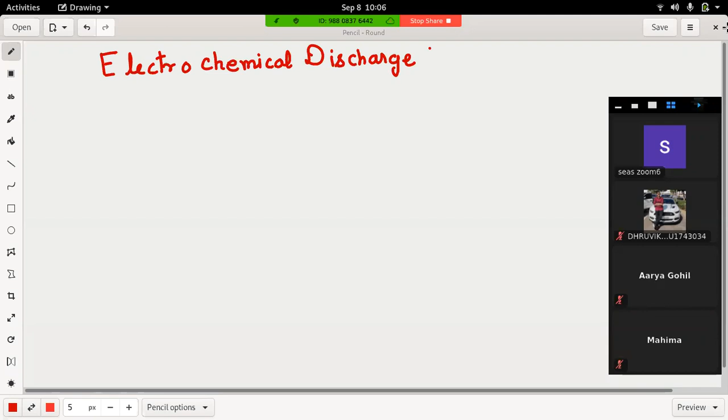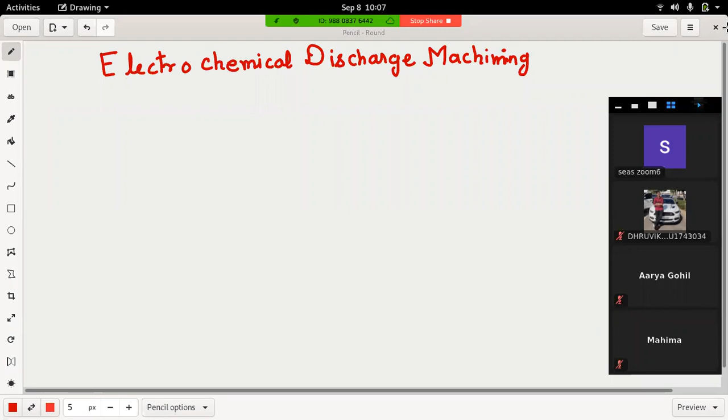Today, we will discuss about another important process, and it's a hybrid process of both the processes, and it is called ECDM, that means electrochemical discharge machining. In short, it is written as ECDM. In fact, the basic purpose of explaining ECM and EDM to you was to introduce this process, that is ECDM.

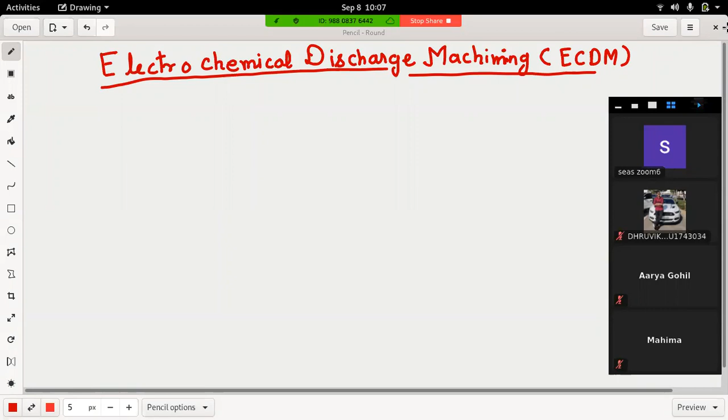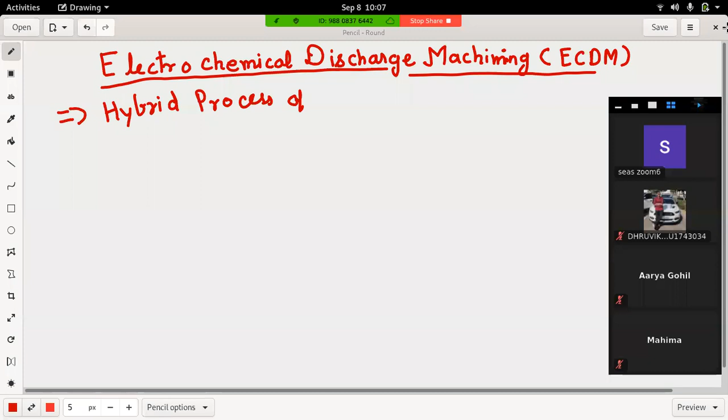ECDM is basically a hybrid process of EDM and ECM, and it combines the principle of both EDM and ECM. Or you can say the material removal takes place by both the processes, EDM and ECM.

Another important thing is that it is mainly used for micro machining, or removing very small amount of material. It is not suitable for removing the bulk material. So mainly used for micro machining, it means removal of the material in very small parts.

And scribing on hard and brittle materials, especially glass. I would just like to share, it is also used for most of the non-conducting materials, like polymers, sometimes stones. This is because the temperature range goes very high, just like in EDM.

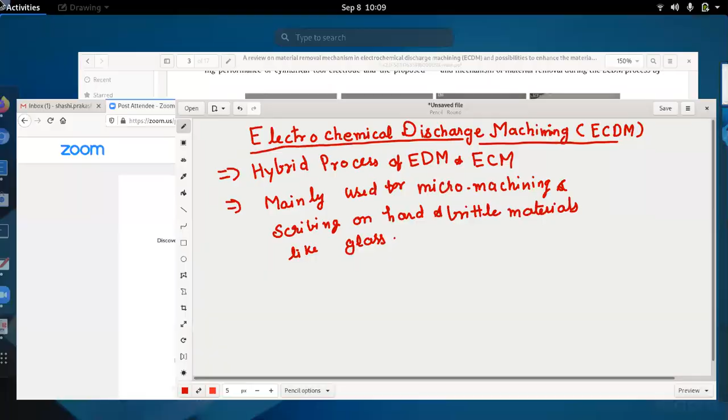And I will share one video before I start, to show how the process goes.

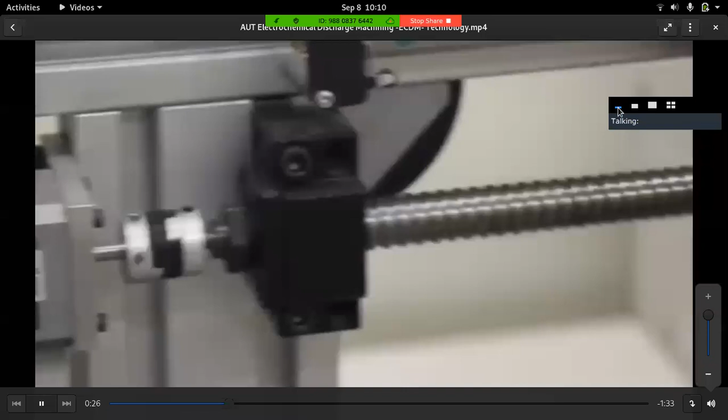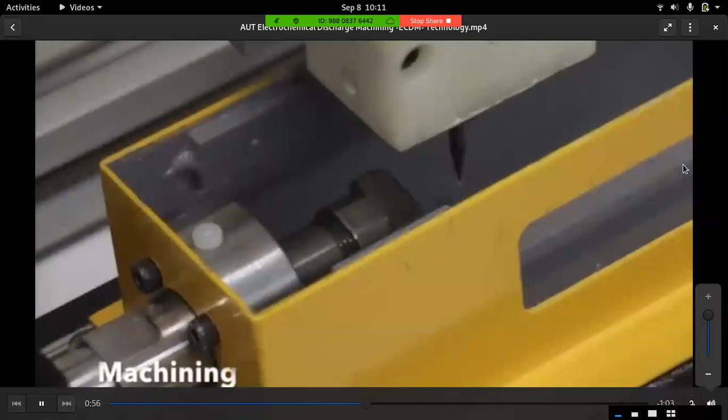So here is an electrode which is having a very sharp tip, and this is machining on some part which is glass, and you can see it is brought close to another material which is rotating, which is actually another electrode, also called counter electrode. The machining starts only when there is a sufficient distance between these two electrodes, that is the tool tip, and then there is this big rotating electrode.

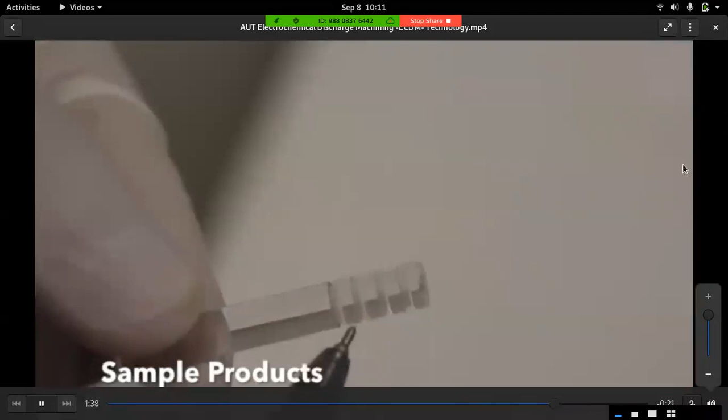All of them are dipped in electrolyte, just like in ECM, and the machining is taking place on glass in this video. You can see the threading which has been done on glass. This is a very precise process, especially for materials like glass.

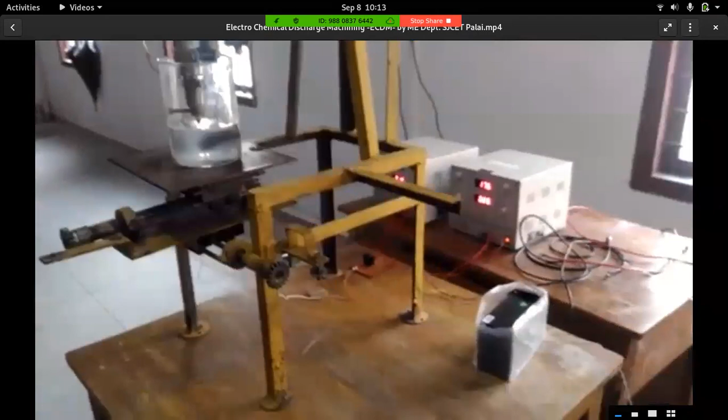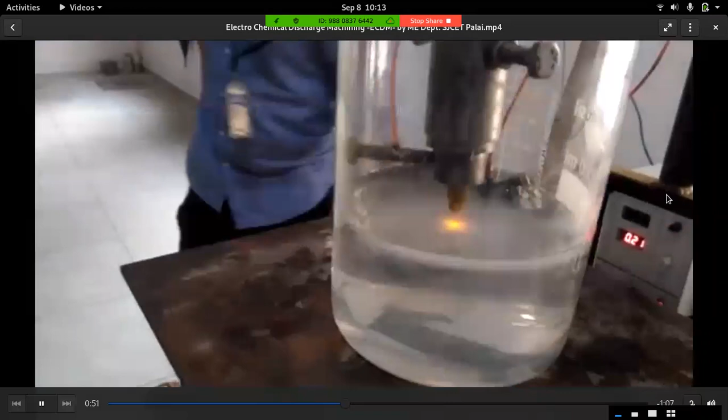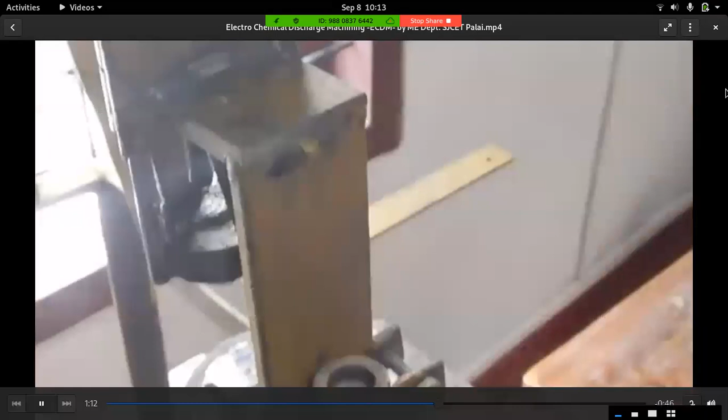There is one more video which is also good, I hope you can see this. So this is a very raw setup developed at some college, and you can see how the machining is taking place. Here again you can see this tool tip, and then another electrode which is a very heavy electrode. Both of the videos have been taken from YouTube.

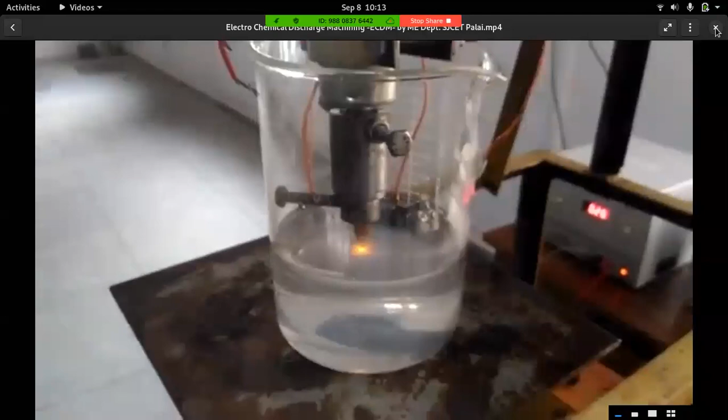Now, the material removal actually takes place in form of erosion due to cavitation, very similar to other processes like melting and evaporation, which occur because of the temperature that develops when the spark takes place. Therefore, these two things combined together, a particular hybridization, where basically the material removal is done by basic electrical discharge process, that is also called spark erosion process, and a small part of material is also removed due to the electrochemical machining process. Now, basically there is a lot of discharge.

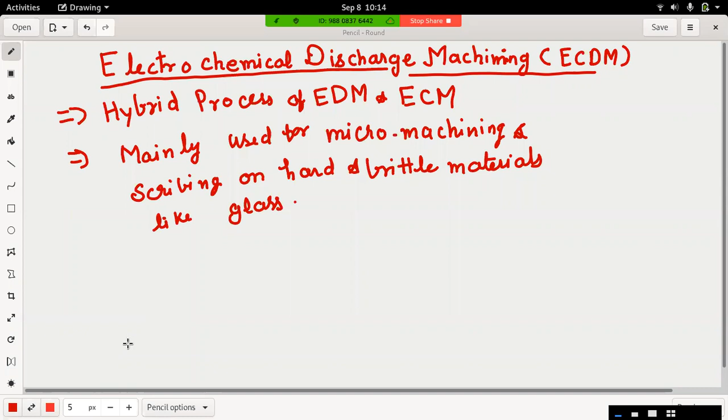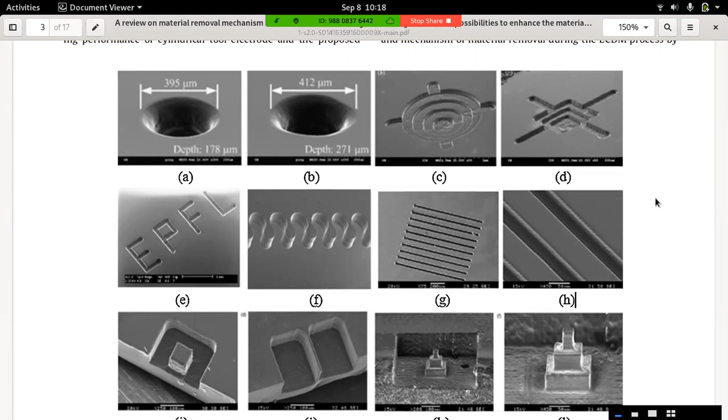Depending upon the kind of tool movement, we can create 2D as well as 3D structures very easily and very precisely. If you see figure C and D, these are the 3D structures which have been created on glass. Different patterns can be easily machined over the surface as seen in other figures like F, G, H, I, J, K, L. The last figure, if you can see K and L, and the aspect ratio which has been achieved

by using this process is almost not possible by any other process on the glass. So when I say aspect ratio, it means the depth. So it is very difficult by other processes to machine the surface like this.

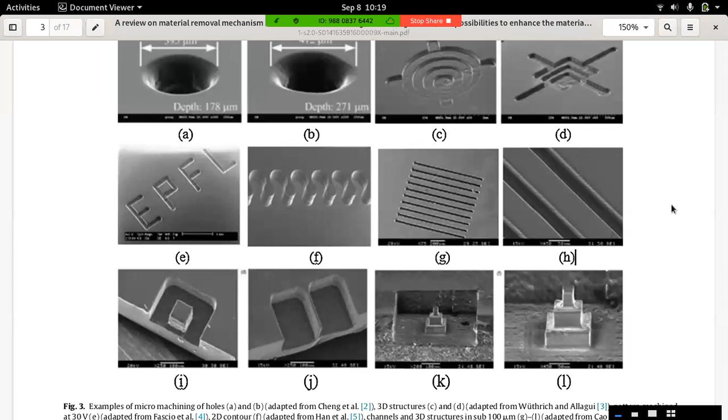And the basic process is because of this gas bubble formation around this tool tip and then collision between these gas bubbles. So they create a gas layer or a thin gas film around this tool tip, which further acts as a dielectric, and then this discharge occurs like EDM.

So the first work on this electrode effect of anode and cathode was started by Foucault as early as the 1850s. Later on, some Japanese scientists like Kurafuji and Suda started working on this process in 1968. So there was a huge gap. The process was basically started for machining glass, as it was very difficult to machine the glass. So they started working on this, creating a huge temperature and then melting the surface.

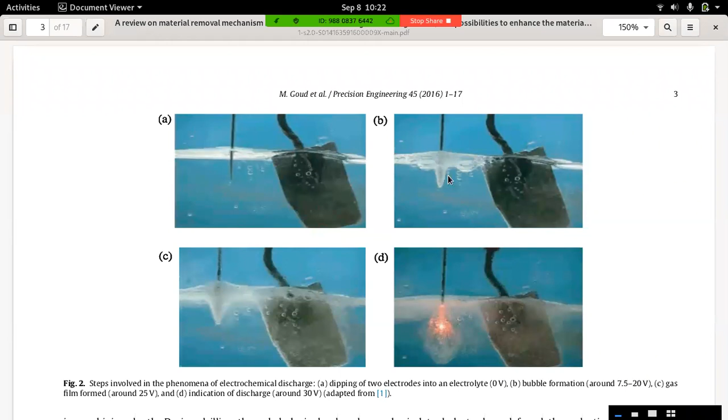Just keep in mind that it is the combination of electrical discharge machining and electrochemical machining. So these two things. Chemical machining means etching occurs. Let's go

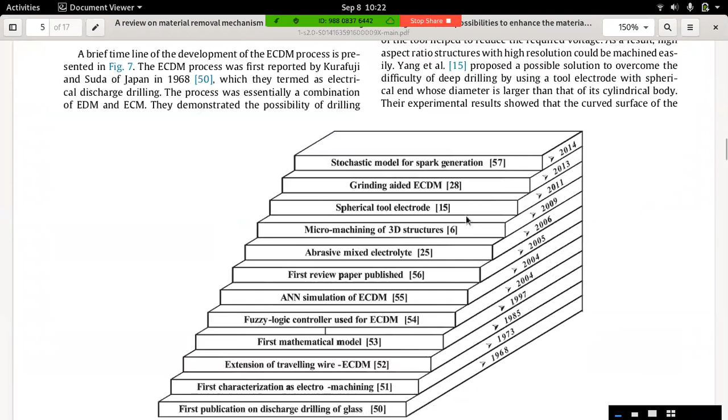into the mechanism. This process can be run by AC and DC both. The basic mechanism of material removal is still EDM, or the high temperature melting, and the formation of gas bubble becomes the most important parameter for initiating the spark in this process.

So the mechanism of machining mainly depends on the gas film which occurs or forms at the cathode electrode, or the electrode with very small dimension. Mainly the gas film is formed by collisions of the bubbles on the electrode surface.

A combination of the gas bubble formation and then collision, then again formation and collision, takes place as we give some electrical power between cathode and anode.

This bubble layer around the tool electrode comprises three regions. One is the adherence region, where it remains adhered to the tool surface. After this adherence region, there is a bubble diffusion region. So the part of the bubble which remains attached to the tool electrode is the adherence region, and then the diffusion region occurs. At the outermost area, we call it the bulk region.

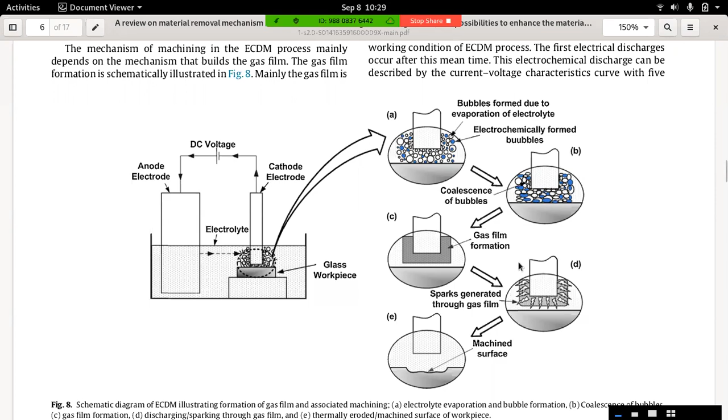Some of them we can discuss here, like buoyancy force, which helps the bubble go to the upper surface, and that is also why bubbles generally start moving towards the upper surface, with a very low concentration of bubble near the tip inside the electrolyte. That is why the tool tip is dipped for a very small depth inside the electrolyte, because most bubbles actually form near the surface of the electrolyte. Therefore the discharge does not happen at the tool tip, it happens on the surfaces which are near the upper surfaces.

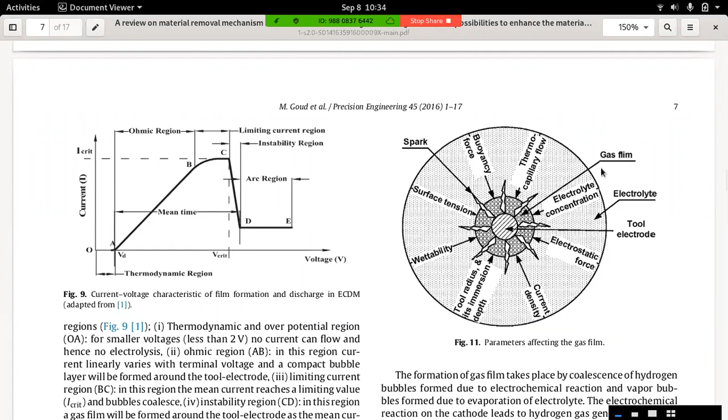We can't say that this is affected due to just one process. A number of processes are there, like what is the tool electrode, what is the material, what is the wettability, what is the rotational speed of the tool, and if the tool is abrasive coated or not, what is the size, what is the feed rate, and similarly power supply parameters like if it is AC or DC, what is the voltage, what is the duty cycle, what is the polarity, and workpiece, whether the workpiece is electrically conductive or non-conductive. So many parameters affect this process.

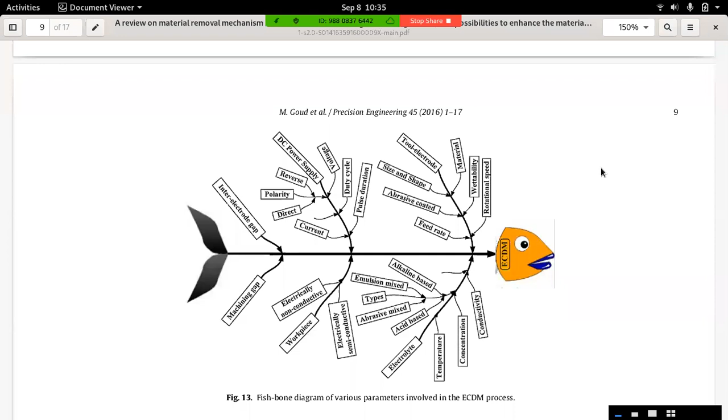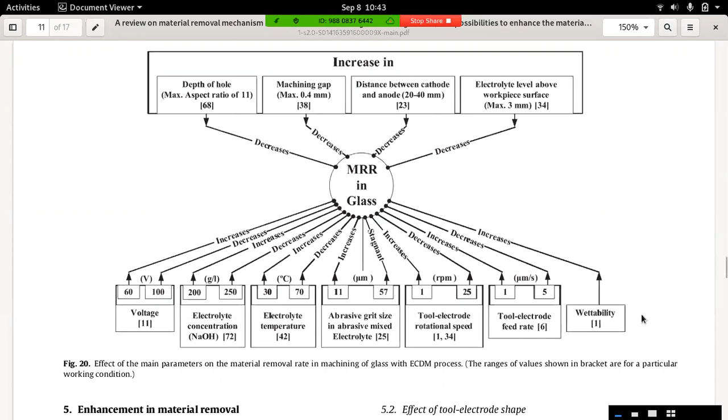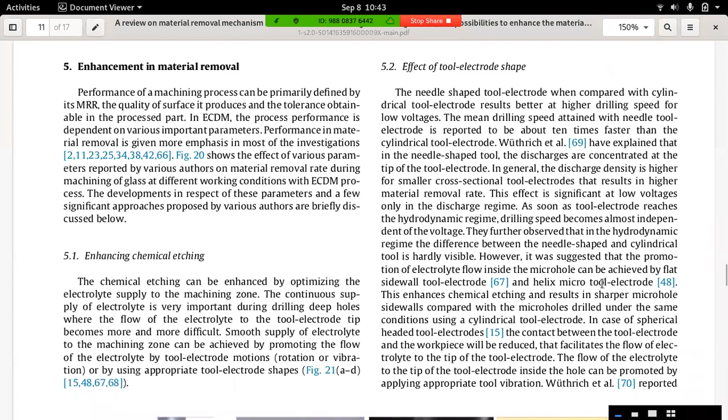एंड देन लास्ट देयर इज दिस वेटाबिलिटी। तो वेटाबिलिटी टूल सरफेस की ज़्यादा होनी चाहिए, ताकि उसके ऊपर गैस फिल्म का लेयर अच्छे से फॉर्म हो जाए। सो दीज फैक्टर्स affect the process of ECDM, and there are various methods by which we can improve this MRR by just adjusting these parameters.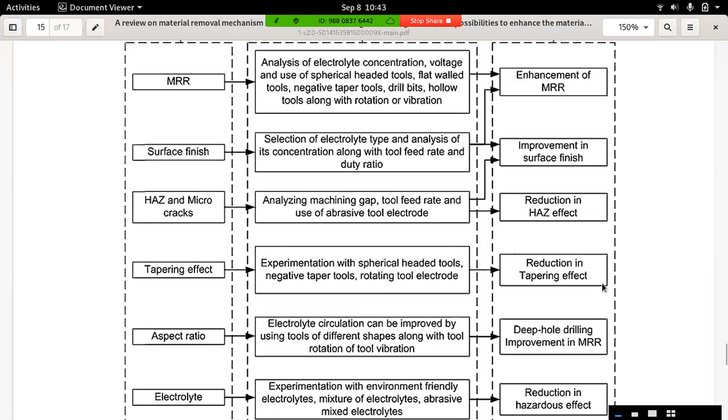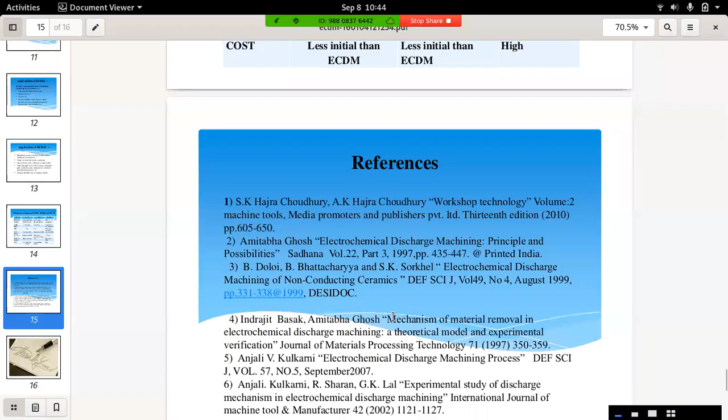So there are some applications available of ECDM, but not a lot of theoretical analysis is available for this process. Most of the research or literature is available in form of experimental data, and it varies hugely with material to material. तो इसके लिए कोई solid analytical physics based material available नहीं है।

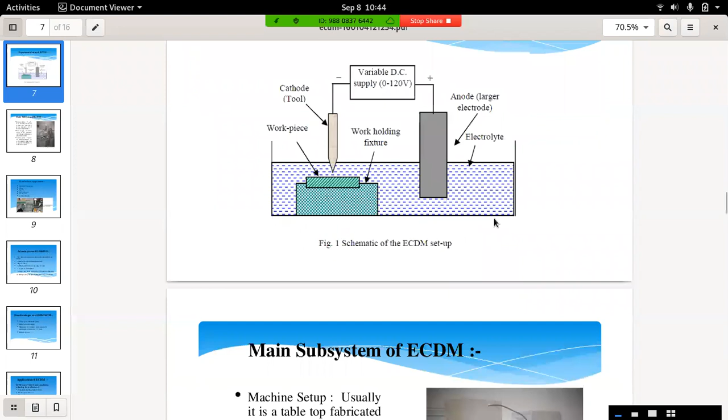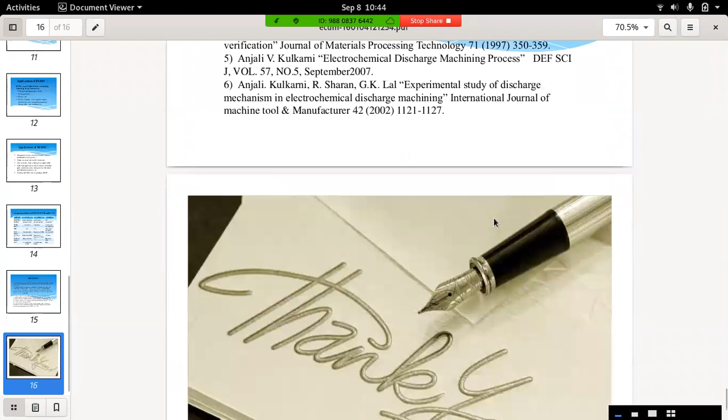So I will share one research paper which I have actually utilized for explaining this concept, and I hope the concept is pretty clear.

The gas bubble, and then this gas film forms around this tool electrode, and this gas film bubble के collision से form होती है। ये जो गैस फिल्म है वो एक डाई इलेक्ट्रिक की तरह काम करती है। एंड देन दिस डाई इलेक्ट्रिक, at one end there is this electrolyte, then there is dielectric, and then there is tool जो है वो जनरली सिलिकॉन कार्बाइड का बनाते हैं।

So silicon carbide is the most common material for this tool electrode for the reasons like उसका wear rate बहुत कम होता है। Silicon carbide can take very high temperature, तो उसके कारण टूल वेयर बहुत ही कम हो जाता है।

Also silicon carbide generally remains chemical inert। तो चाहे आप sodium hydroxide इस्तेमाल करें या potassium hydroxide या sodium chloride, उसके कारण सिलिकॉन कार्बाइड और टंगस्टन कार्बाइड दोनों यूज होते हैं। टंगस्टन कार्बाइड सिलिकॉन कार्बाइड से भी ज़्यादा टेम्परेचर ले सकता है। सो टंगस्टन कार्बाइड इज द मोस्ट कॉमन टूल मटेरियल।